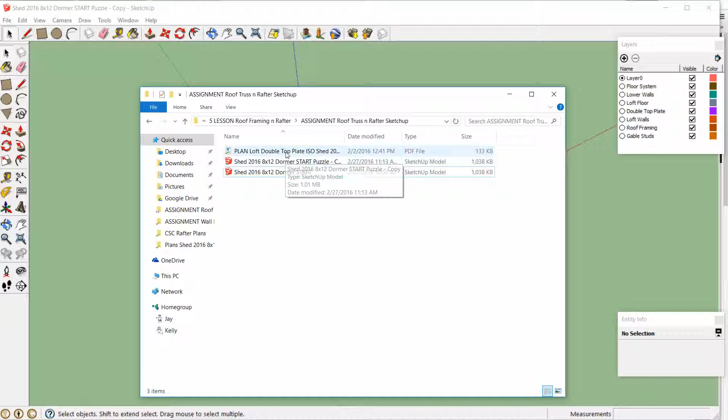So we're going to need a couple things from the Google Classroom. You're going to want to download the Shed SketchUp, the one that says Start, and also open up the Loft double top plate ISO plan. Here's our plan, kind of an isometric view. When you first open up that SketchUp, it should look just like this. I want you to save it as your own, File, Save As, and put it into ThawSpace.

By referencing the plan, you're going to work to assemble the double top plate in the loft. I've kind of got it in order for you. Here's your double top plate over on this side, and then your loft is over here. So you're basically going to work from left to right. This will be your last piece that goes on over here.

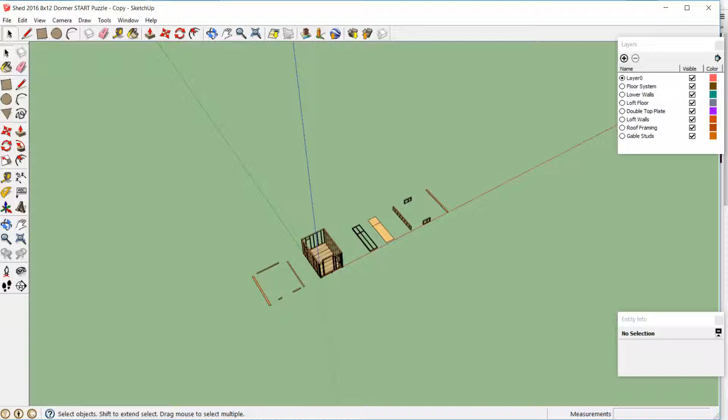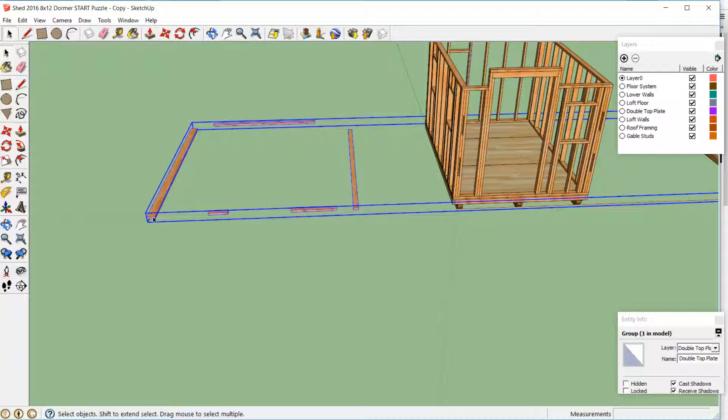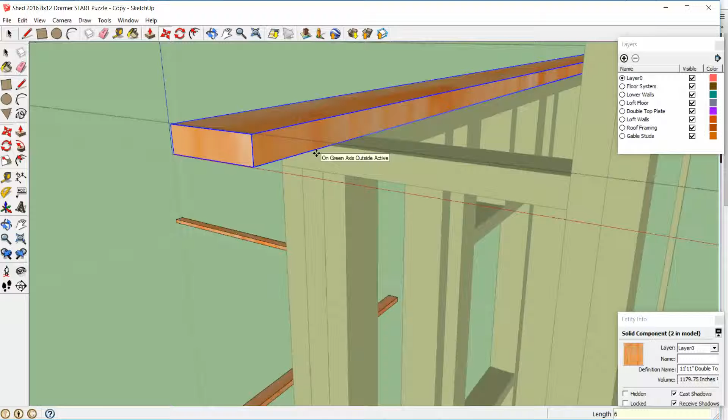I'm going to go ahead, and I told you to start from the farthest. Let's go ahead and take this piece of double top plate here. M for move, grabbing a corner is good. Let's bring it up to the top. Now I'm going to put it in a weird spot here. I've aligned it with my 2x4 there because it is going to overhang over this edge. Now I'm just going to grab that corner and slide it out, keep it on axis, and then slide it out for an overhang of 6 inches. 6, enter. There we go. The 2x4 double top plate is in place.

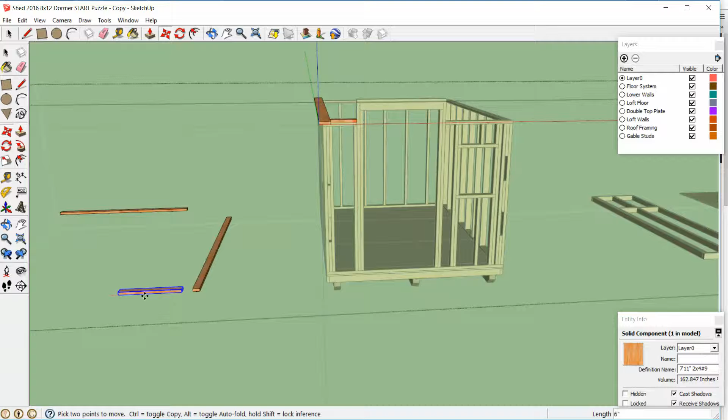Next piece, this little one right here. When we move things, grab corners. I'm going to grab the corner down low. I want to bring it up into place. Right there. Let's see here, this one goes to the other side. Space bar for pointer, M for move, grab a corner, and we're going to plop it in right there.

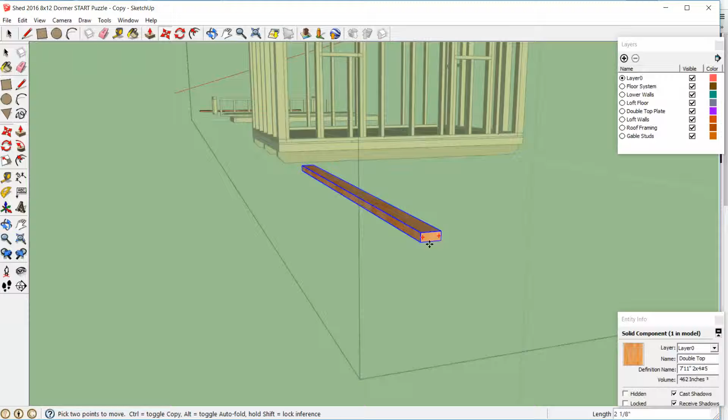I'm going to go ahead and put this guy on. M for move, grab corners, snap it right to that corner. And my last piece for my lower walls is this back piece. M for move. Let's bring it right into place, make sure you get them in the right spots. There we go. Alright, our lower wall double top plate should be completed at this point.

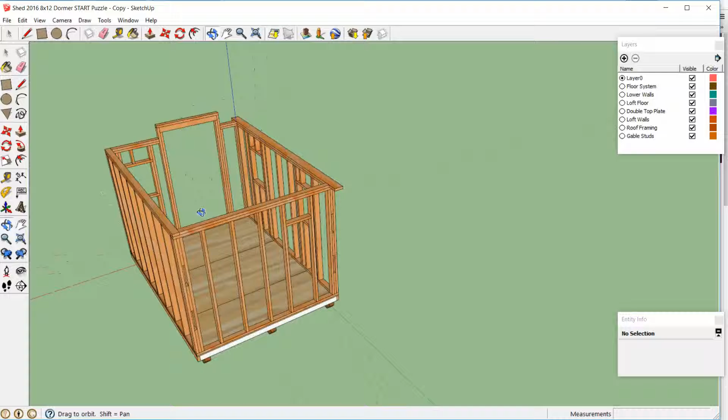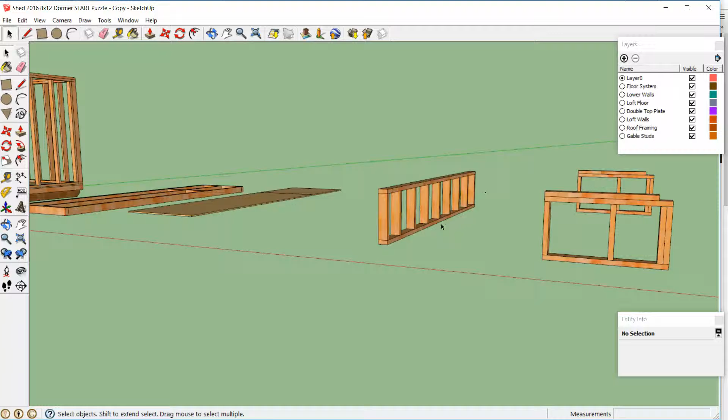And now we're ready to start assembling our loft. Let's take a look at what we have. Our loft has a floor system, floor framing system, then it will have sheathing on top of that floor framing system, which should remind you of doing our lower floor. Then we'll start our walls. Now our walls are kind of small, short I guess you could say, but walls nonetheless, following the same rules, 16-inch on center spacing, and then lastly a double top plate.

Now when you go to build your floor system, you're going to need to verify the actual length of your house, because you may have strayed a little bit from the specified dimensions. When you build this floor system for the loft, you want to make sure you go from end to end of your house, so you'll want to make those measurements and follow the plans closely.

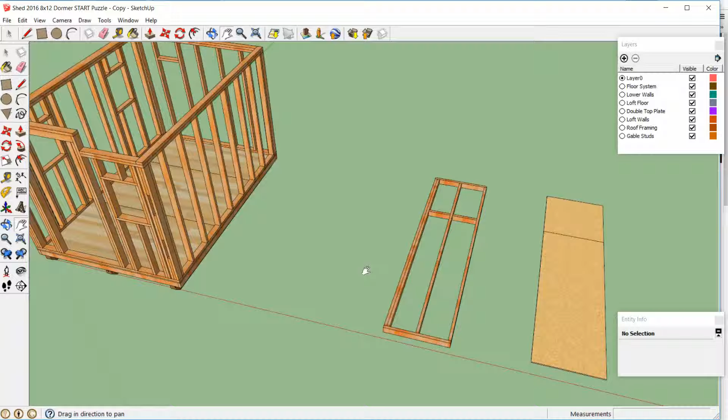Let's go ahead and bring our floor frame up to our second level here. Snap it into the corner. There we go. Now notice this, we're doubled up on the front of our floor frame. That's because this is virtually a 12-foot span, and we wanted to make sure we had enough strength there.

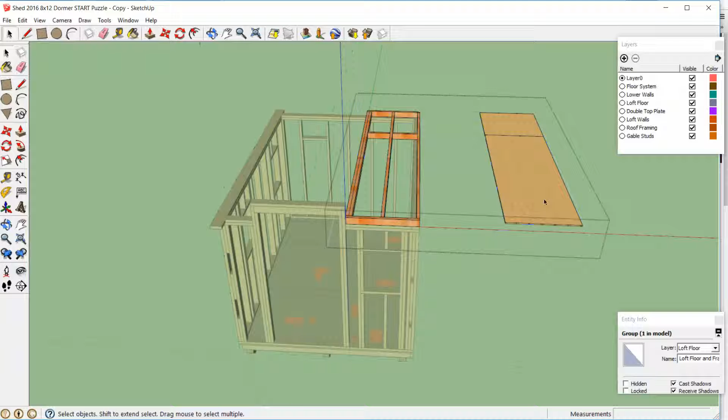So we've doubled that floor joist up, and we're going to put our sheathing on top of that. This is a thin sheathing—we're just going to use a half inch. This is mostly just going to be storage up here. On our lower floor, we went with 3/4 inch because people are standing on it, but this one is just storage, so we're just going with a half inch in this plan.

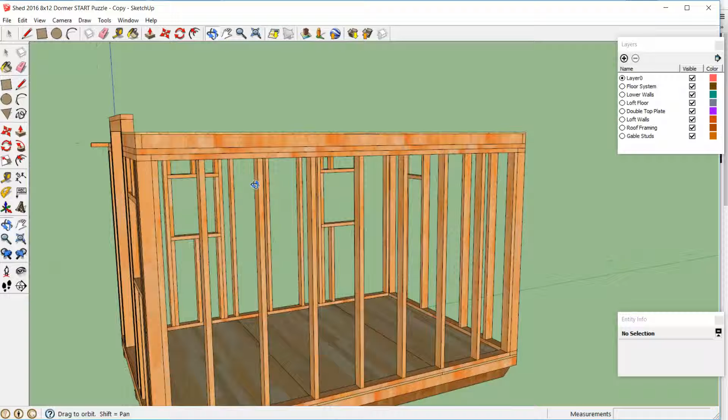Alright, so there we have our floor system in place and sheathed, and it stretches from end to end. Make sure you measure your existing lower wall's length and then cut your floor joist to match the dimensions.

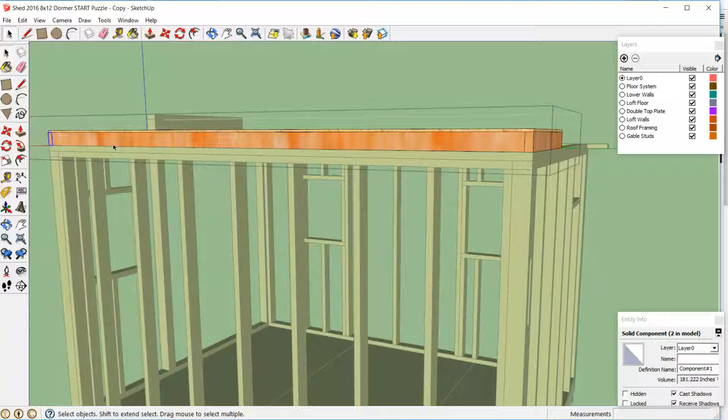But notice the overlap—I have the rim joist overlapping, so this inner floor joist is actually going to be 3 inches less, minus an inch and a half for that, minus an inch and a half for that. So when I measure, if I'm 131 and a half minus 3 inches, it's going to be 128 and a half for my floor joist. Make sure you make that measurement—it'll make your house look a lot nicer when we go to sheath. It doesn't matter if it's a little big or small, we can work with it.

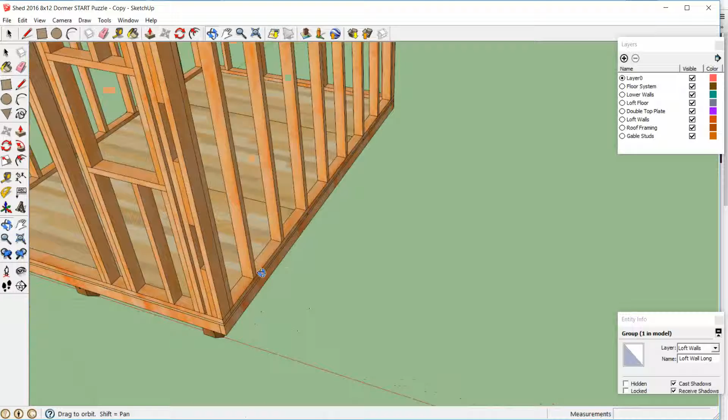Alright, time to put our walls up top. Let's go ahead—I want you to frame this right wall just like on the lower part first, and let's go ahead and put it into place. But remember, it's not going to be at the end. Look down here—is our lower wall at the end? No, it's 3.5 inches over because this is a butt wall and this is a corner wall. So let's plan for that.

Let's put our loft wall, right wall, 3.5 inches over. M for move, grab the corner, type in 3.5. There we go, now it's in place. And you'll notice something interesting here.

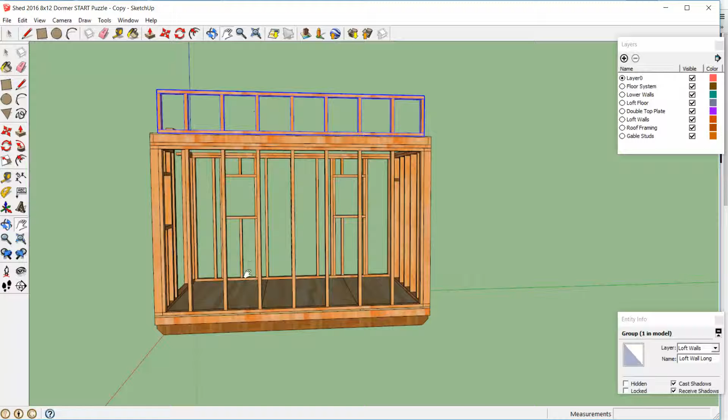If you laid out your studs right, they should be in exact alignment with the lower wall studs—that's intentional. And those studs should be in exact alignment with your floor joists underneath—that's intentional. That way, afterward, when we're running some of our systems like electrical, heating, air conditioning, we can get into these stud cavities and go all the way up if we need to. So that's by design.

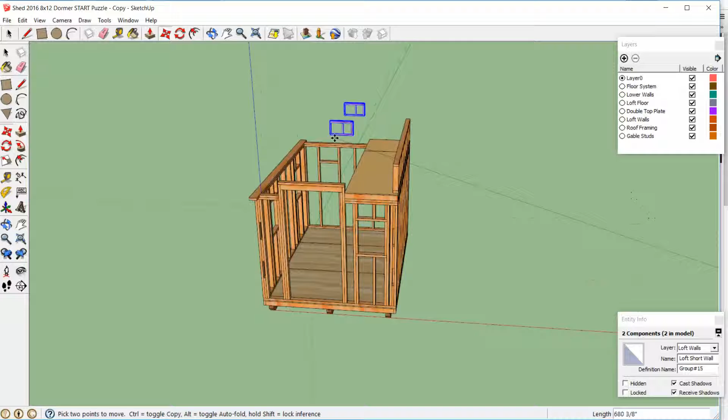Alright, now let's get our walls in place. I'm going to grab both of them at once. M for move. Now if you look at these walls, they're exactly the same walls—the front and back walls are exactly the same. There we go, up tight to there. Let's check this back one, make sure it's in the right spot.

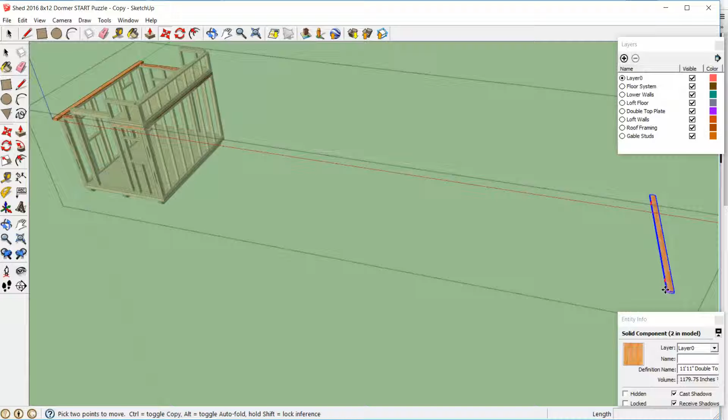Looks good. And then the last piece before we start our roof trusses is this piece of double top plate. M for move, bring it on up—it's going to sit up here. But like the other 2x6, it's going to extend over 6 inches. 6, enter. And there you have it—you are now totally framed in, and you are ready to start adding your roof trusses, which will be the next tutorial.